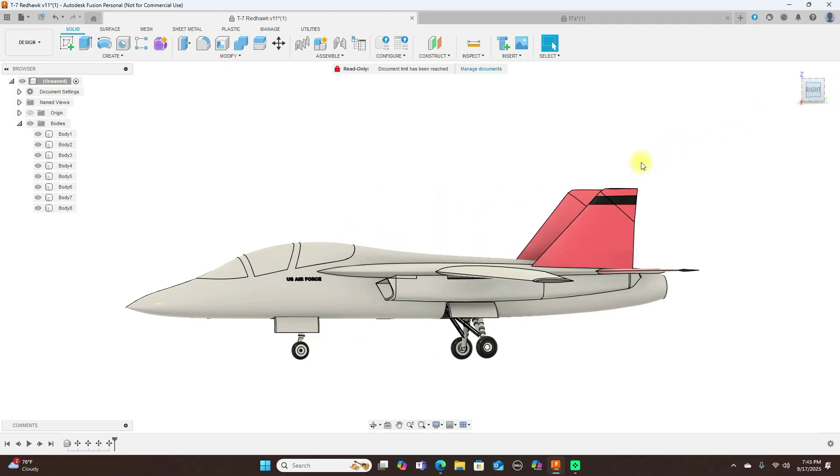Today, we're going to be looking at reverse engineering a T-7 Redhawk. Now, these files here that I have, I did not design these. I got these off of GrabCAD, so go over there and have a look if you want these particular files. This one here was a step file, and it looks like it was probably designed in Fusion 360, but I'm not sure because we don't have a timeline down here of this.

Now these commands here that I used were just to move this around to get it to where I wanted it to be. And so all of these are solid bodies, as we can see already. So like I said, I think this was maybe designed in Fusion 360. And because there's some openings here too, like right through here where the wings come into here and stuff like that.

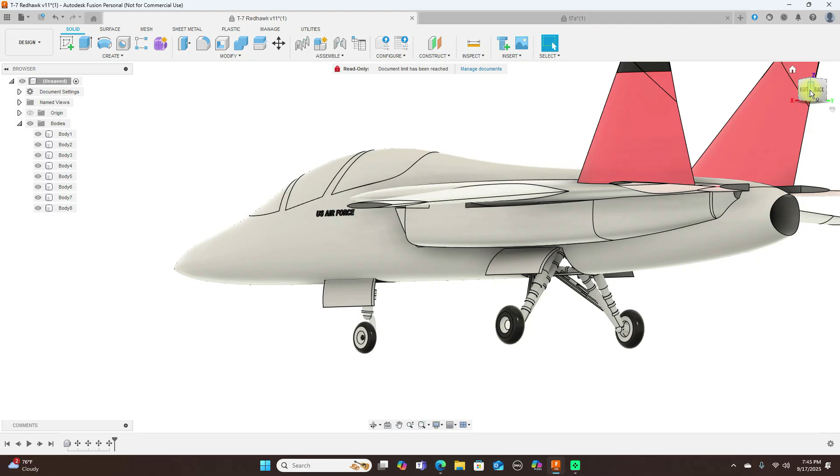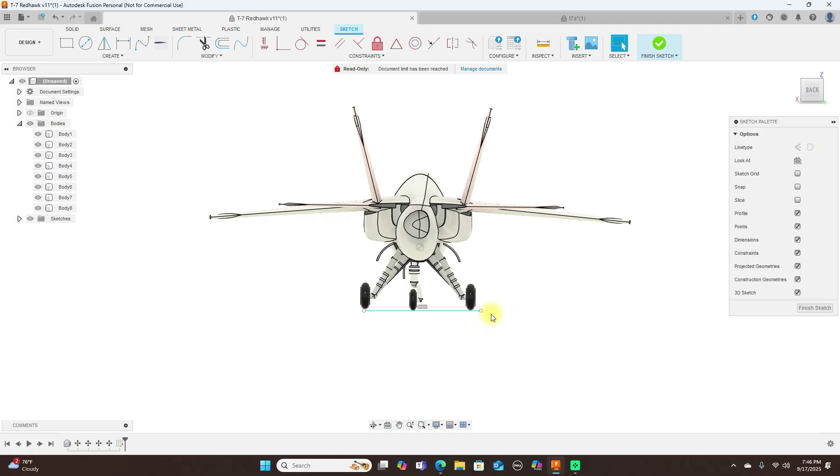And then this is not being totally round back here, and looks like it's just a little bit slightly off because the wheels seem to be flat across. Let's make sure. Okay, we can see that this is slightly to the right a little, and we can take this here and perhaps just move it to the left, maybe a degree. I don't know how many degrees that was. Let's just go with 1 and see, does that line up better? And it does.

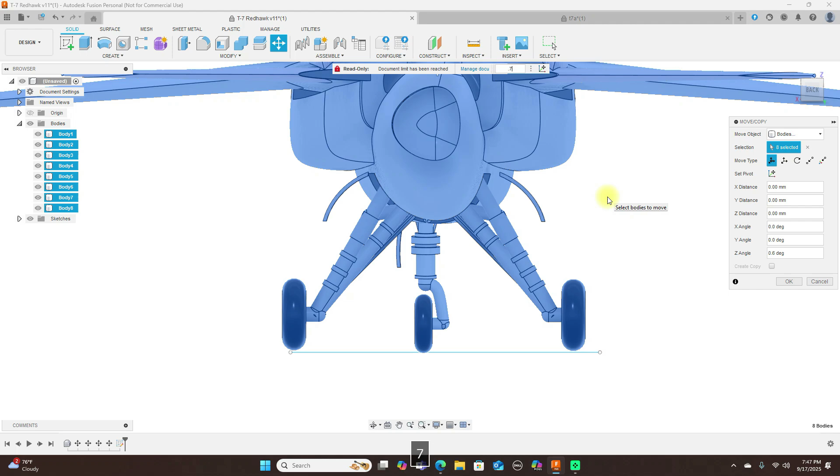Maybe it just needs to be 0.5. Let's go with that. And a little more, or 0.6. Okay, that's pretty much close. And like I said, you can see this is not symmetric here in the back, and this is sort of not symmetric here also.

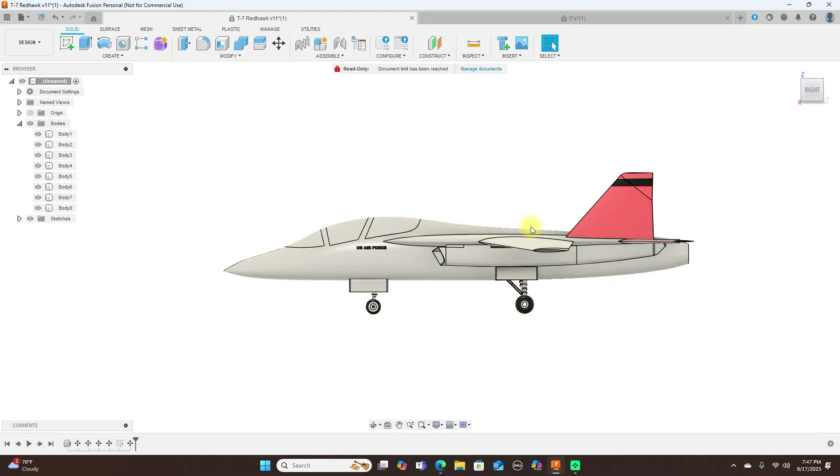So, if you guys want the files for this, just go over to GrabCAD and look for this file, and it is there. Now, I don't like reinventing the wheel, so that's why I went over to GrabCAD to see if any of these planes were available that somebody else had designed, and there were a couple of them over there. Again, this was a step file, and it should be able to open up in SolidWorks and Fusion 360. And then they had another model over there of it.

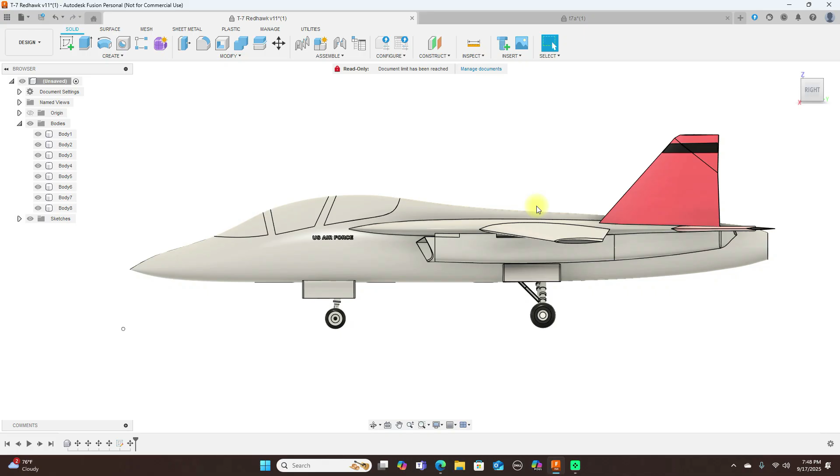And this one's a mesh. And now this was not designed in Fusion 360. This is a very good design of this. Now this other one here, since this is already solid bodies, you can go in here and modify this. So if you wanted to make formers from this, let's say you couldn't open the other file, the mesh file, what you do here, come up to construct and use an offset plane, drag this back. Let's say we'll go to here, for instance. Click OK.

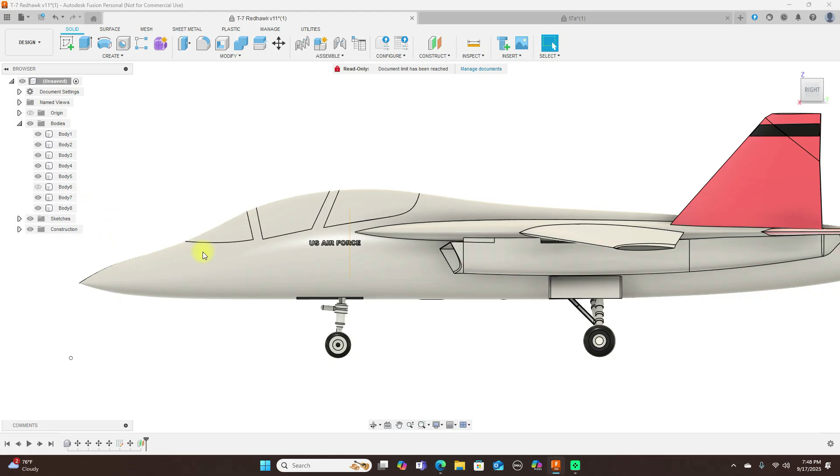I believe these are all separate. Okay. Now what we can do here is come up here to split body. This is the body to split. Go ahead and select that too. And then the splitting tool is going to be this plane here. And click OK. Now this is split. And so what we can do is turn the front off here and then turn these 3 pieces off also.

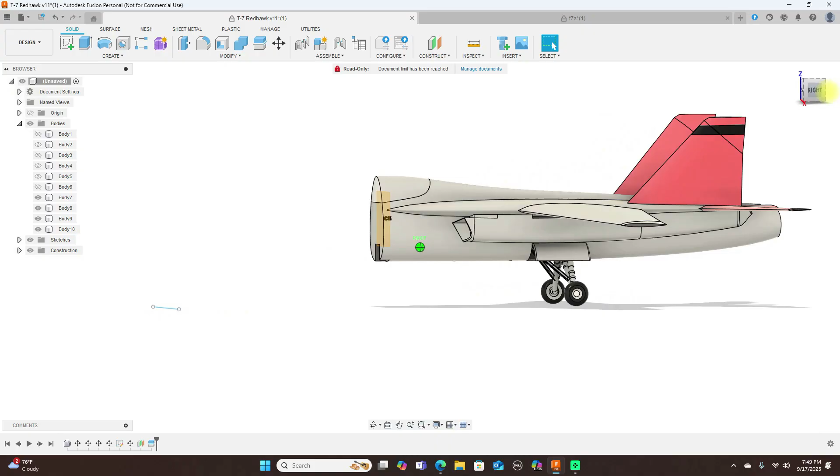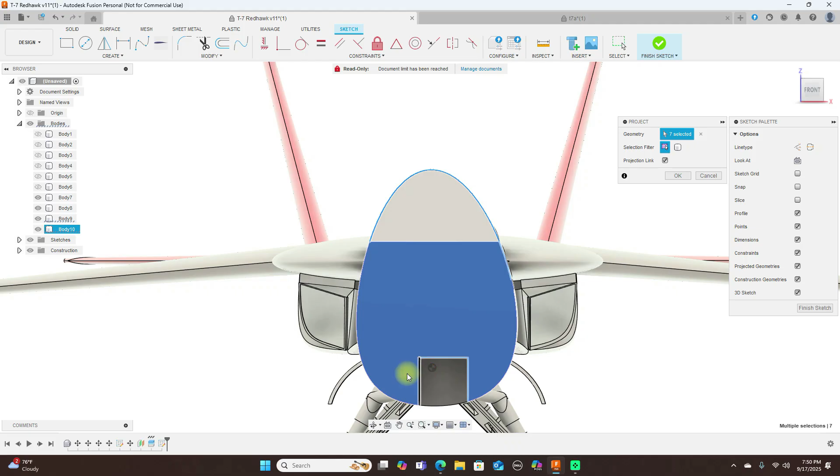Okay, we have this here. And suppose we need formers of this. To get the former, what we do here, create a sketch on this plane here. Now we're going to use the project tool and project all these lines around here. Click OK. Now we finish sketch. And we can turn off the bodies. But as you can see, our former is now here.

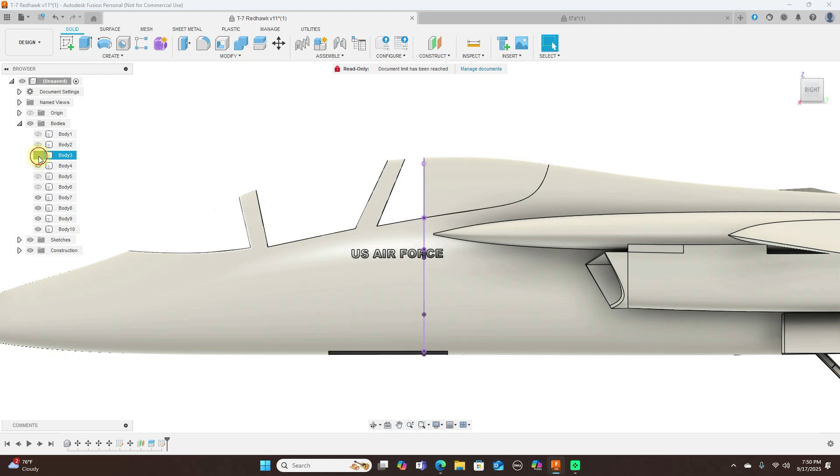So let's say we turn these back on. Okay, turn this front on back here. And we'll do another offset plane. Move this one here. Click OK and split body again. This is the body to split. And we're going to use this there. Click OK. And we have this.

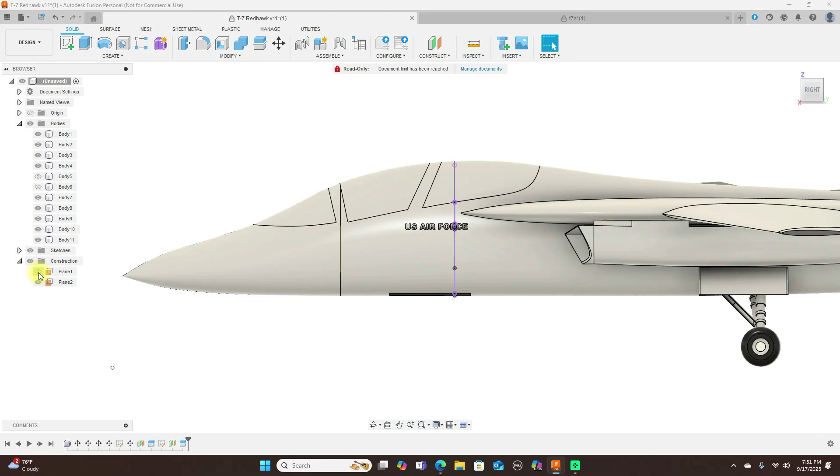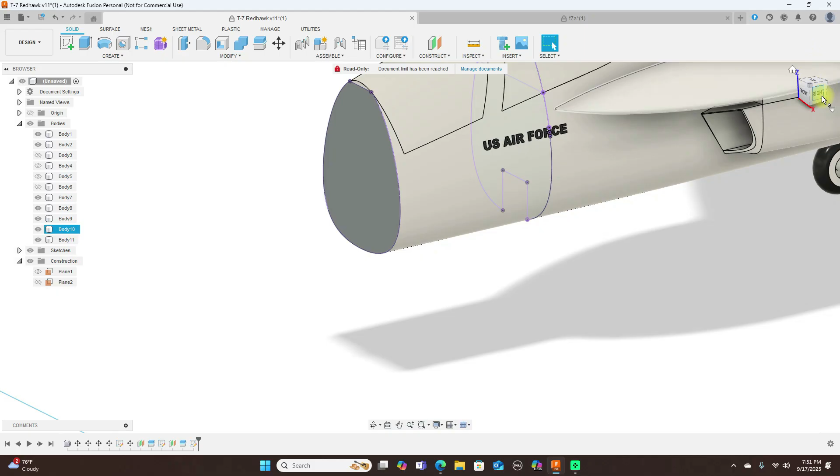Now we turn that plane back on. Turn these bodies off so I can see the plane. Then create a sketch on this plane here. Then use the project tool again. And we're going to project this. So now we can turn the bodies off. And now we have our two formers here.

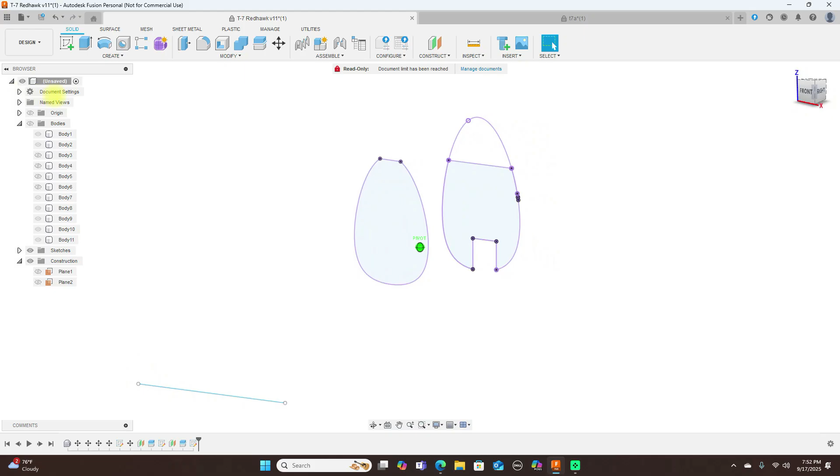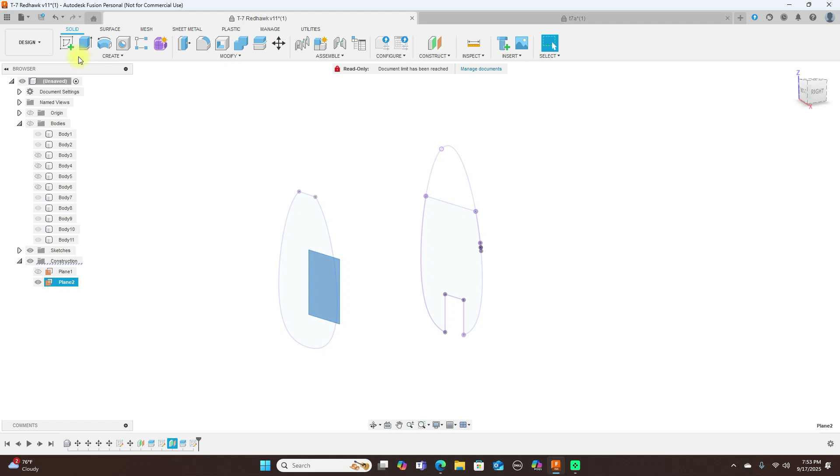Now to project this, not project it, I mean, I'm going to create a sketch on this plane here. Now this is flat up here. This needs to be round. So let's go ahead and cancel this. And turn this plane on. Create a sketch on this plane here. I just sort of missed some of that top when I split this. So what I'm going to do here is project again.

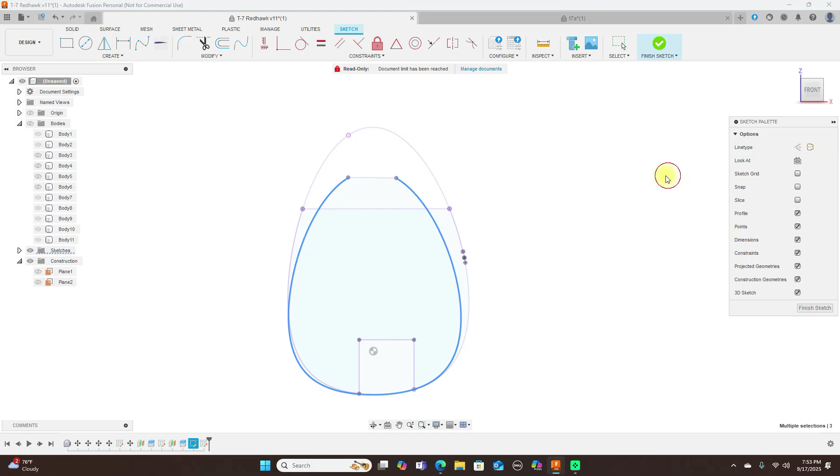Click OK. Let's just use a fit point spline here. Actually, use something else here. I'll use a 3-point arc. Okay, and now we have that there. And that's solid there.

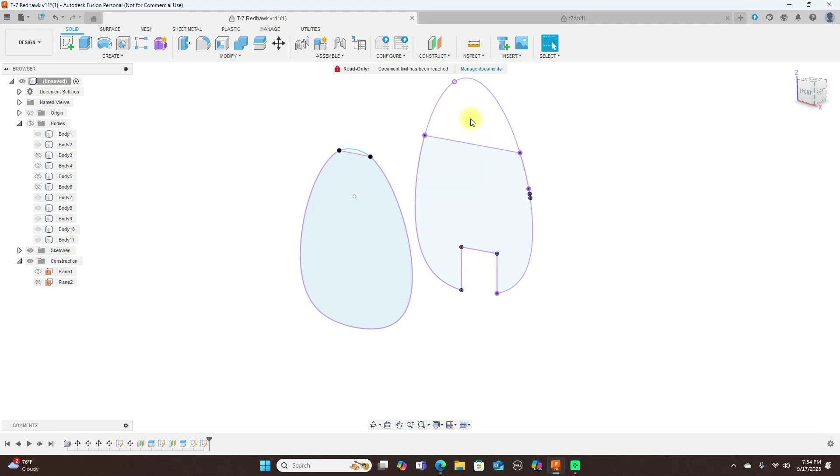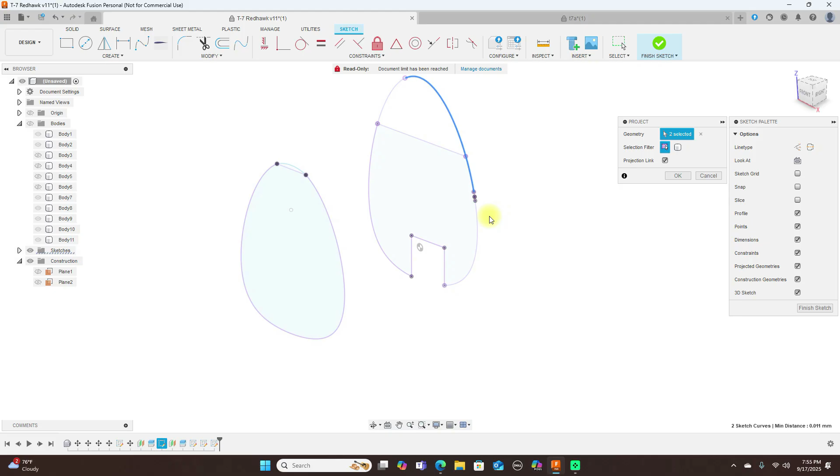I believe this goes all the way over there, and it does. So what I have to do here, I'm going to make this on here also. So what I do is turn this plane on, click this, create a sketch on that plane there, and then we need to project again. And project all these again, and make sure you zoom in to get it all.

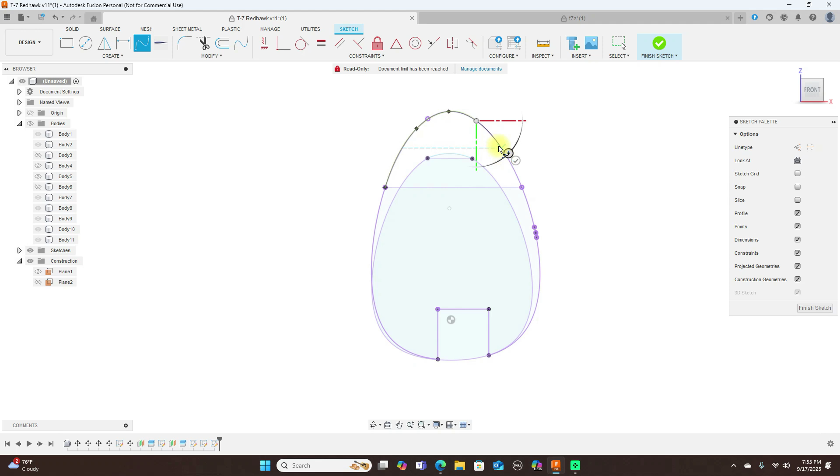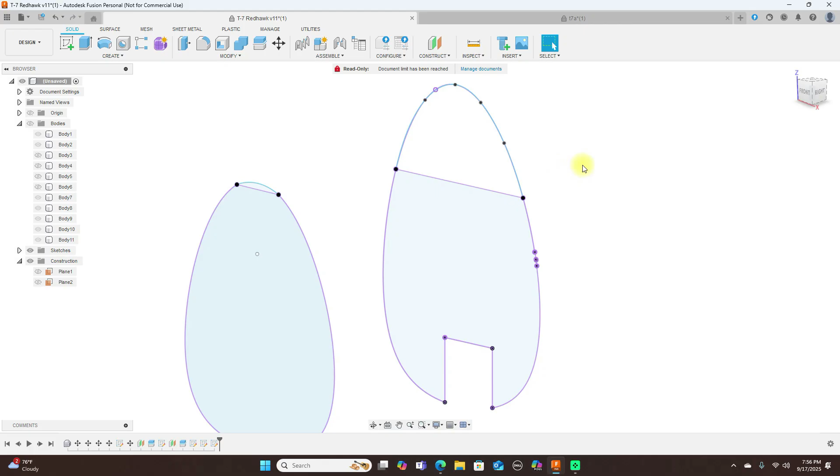Now, I don't know why this is not closing, but we'll solve that. And it still didn't close, but that's okay. Let's take a look at this.

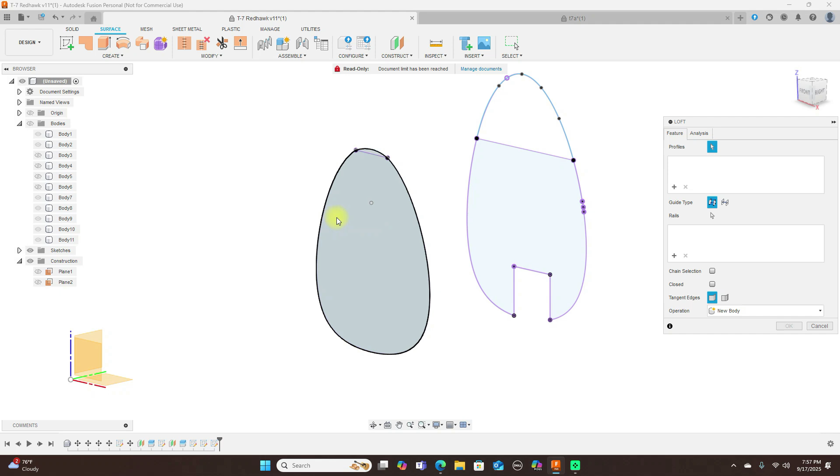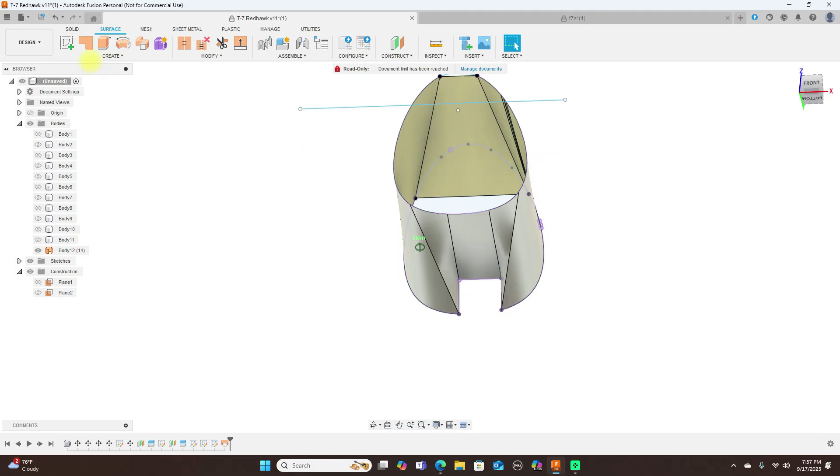Sort of odd, and I don't know why it's not working, but we'll work. Cancel this and do another way of this. Now, this does not look good at all because of this here. And we just can't loft like that. But no worries. But that's how you go about doing that, splitting this particular section up here.

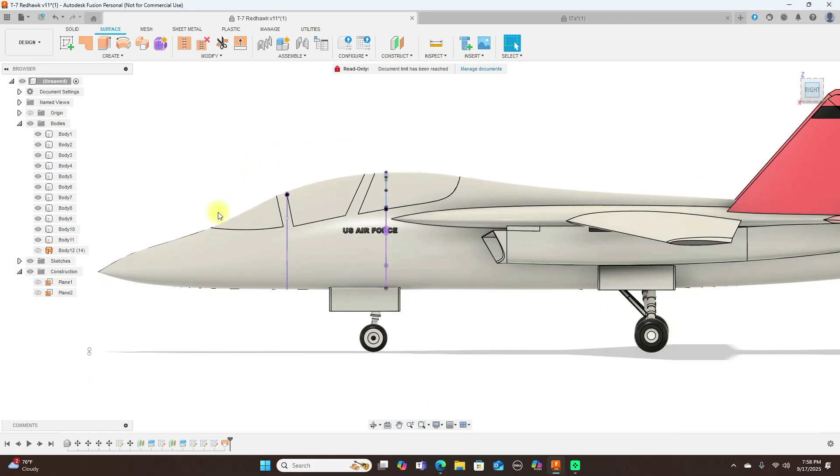Like that. So we have that piece there and this piece here. So to loft between here to here, just make a straight line. Let's go back here. Look at the sketches. Turn these. We need to make this closed at the bottom here. So what you can do here, create a sketch on this plane here.

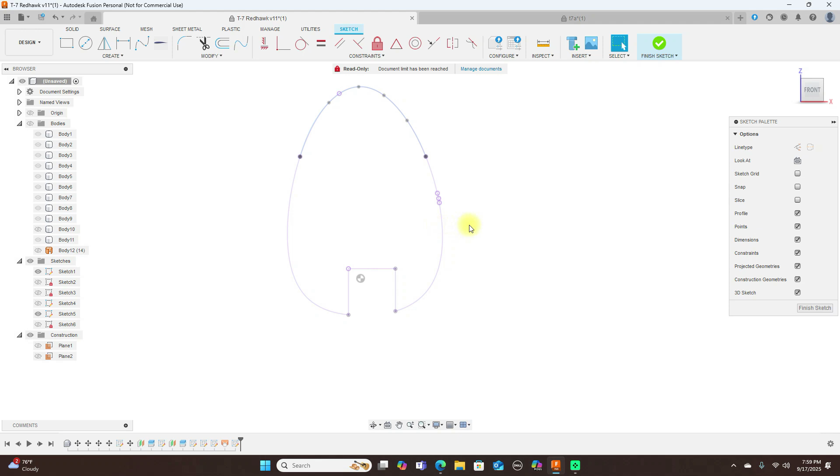And as we can see too, this is not even a really good section. This is not centered. So the person who designed this, it's got some flaws to it, but it's still okay to work with. You can see it's slightly off-centered, but it's no worries.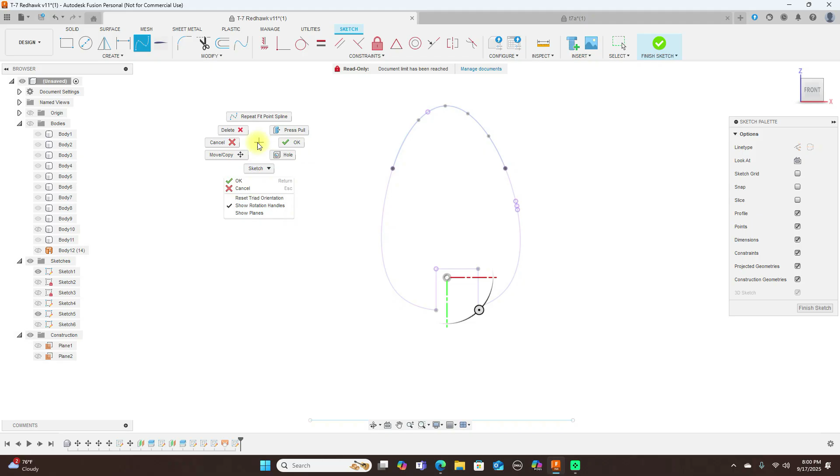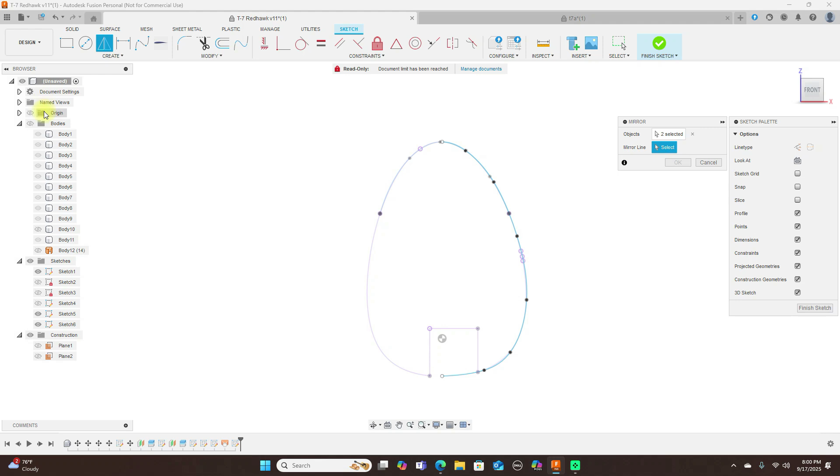Okay, now just come back up here and clean these lines up. Then I want to mirror that line too. And we can see that this here is slightly off to the way the model was designed, slightly off. So now we go ahead and use the loft. And turn all of these off and see what that loft looks like.

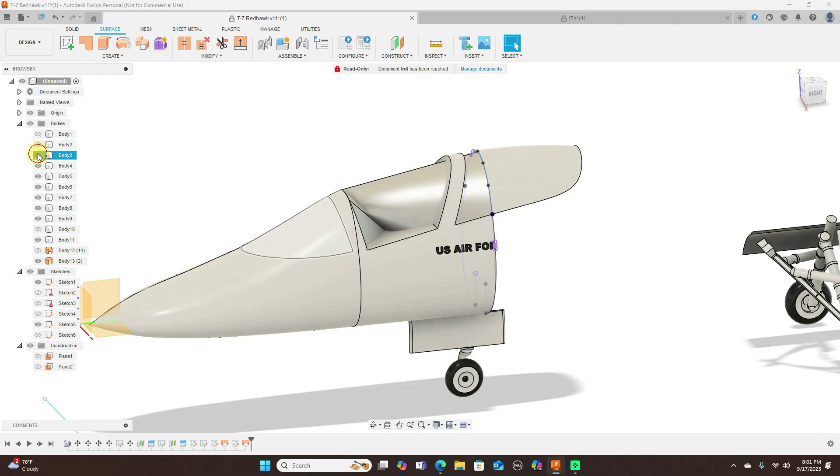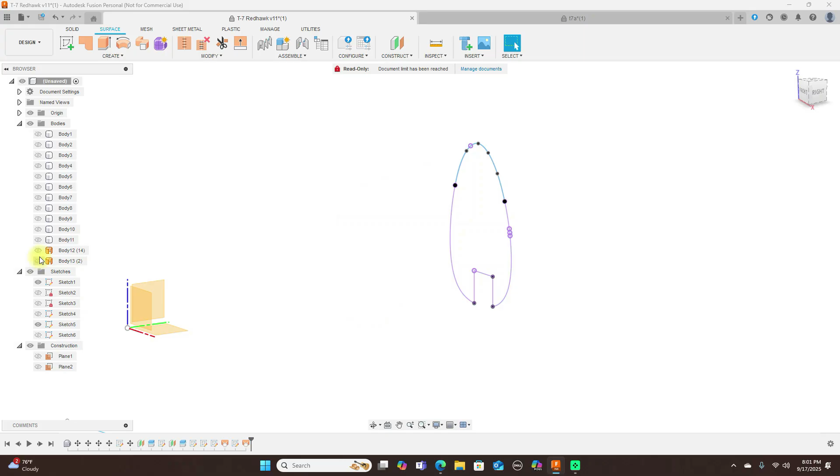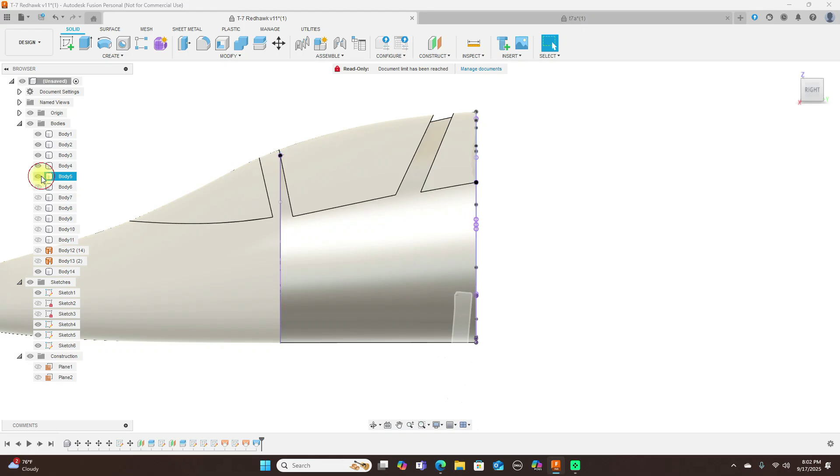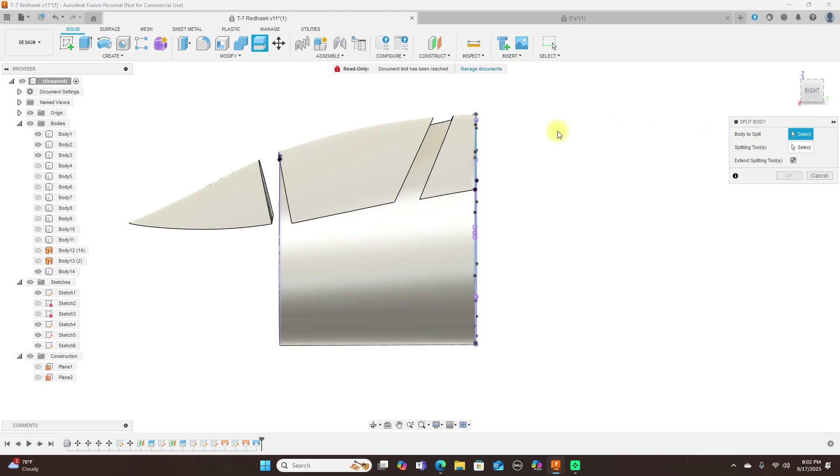Okay, now this is messed up too. Turn that off. Okay. Much better loft. So with this, possibly we just cut that in there. Just like that. So that's some reverse engineering here, how to do this.

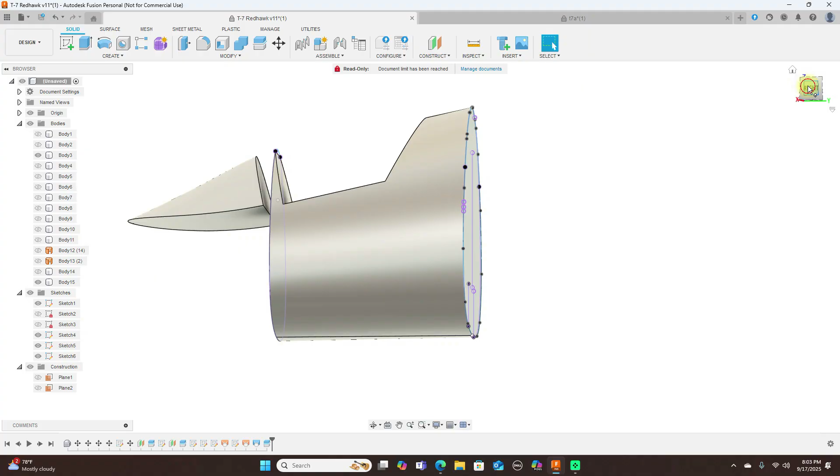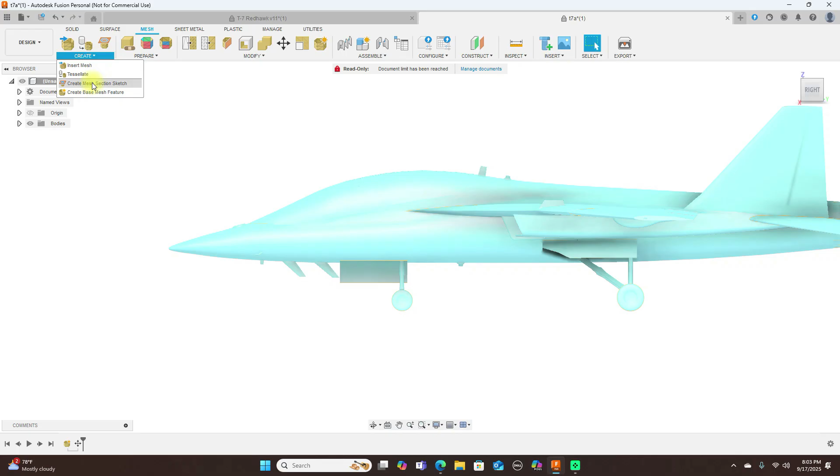But in my opinion, the best way to do this, go back to here, this particular one. Then switch over to the mesh tools. And here what you want to do, come up to create and create mesh section sketches. This is what we're going to use, and then our section plane. Let's start up here.

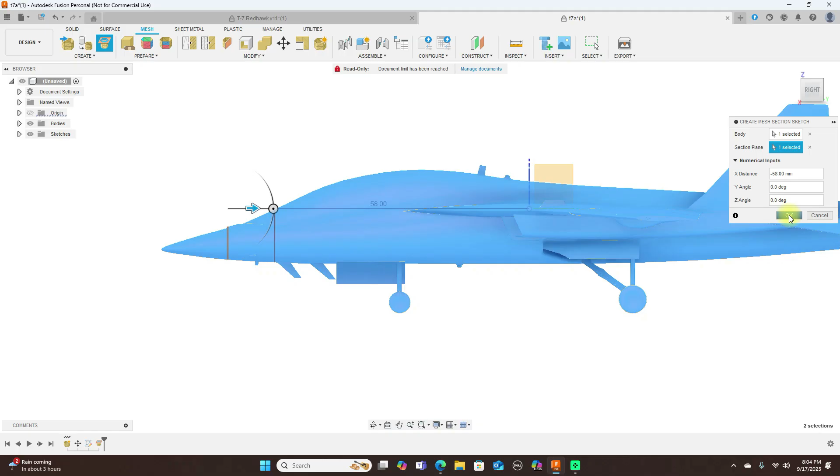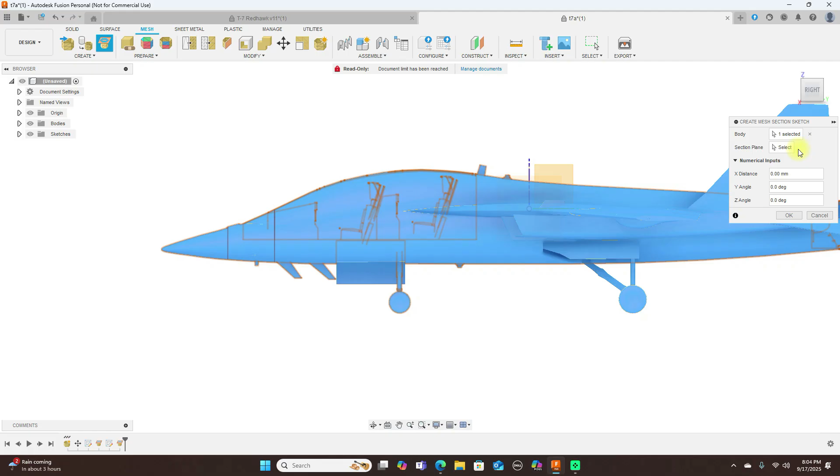And do that again. And I'll do one back here. Turn the bodies off. And we have our former shapes here now. And we're going to use offset planes. Oops, sorry, not plane at angle, offset plane.

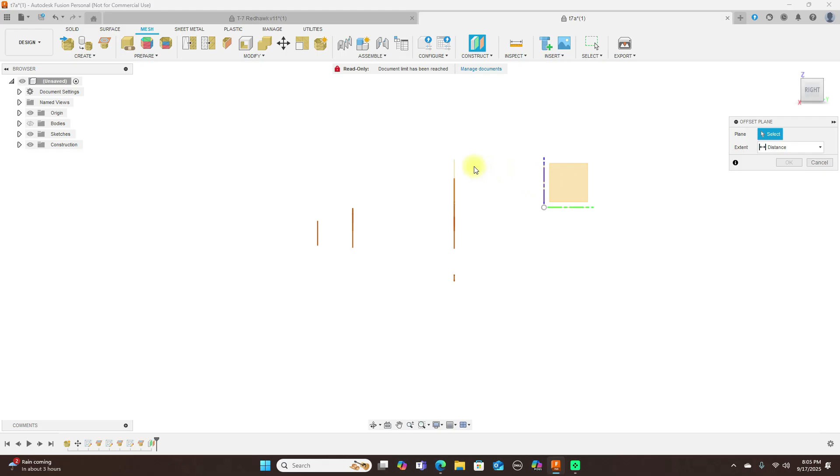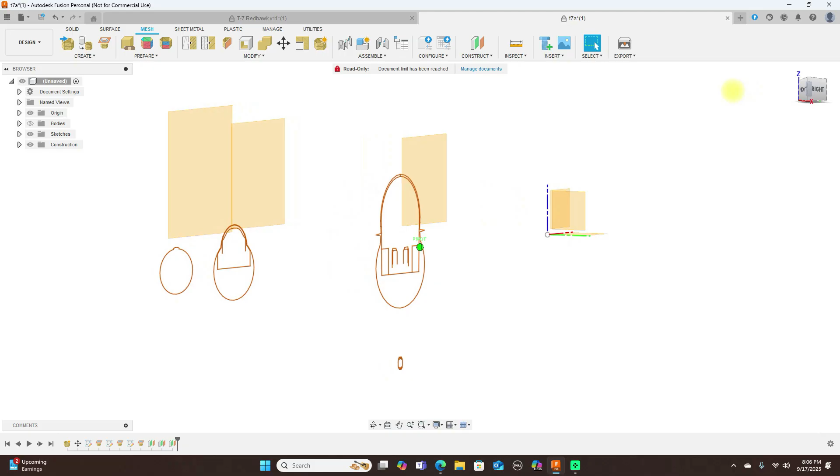Then I want to put the one there. One there. One there. Click OK. And we're going to do these two. So create a sketch on this plane here, but we go back to solids.

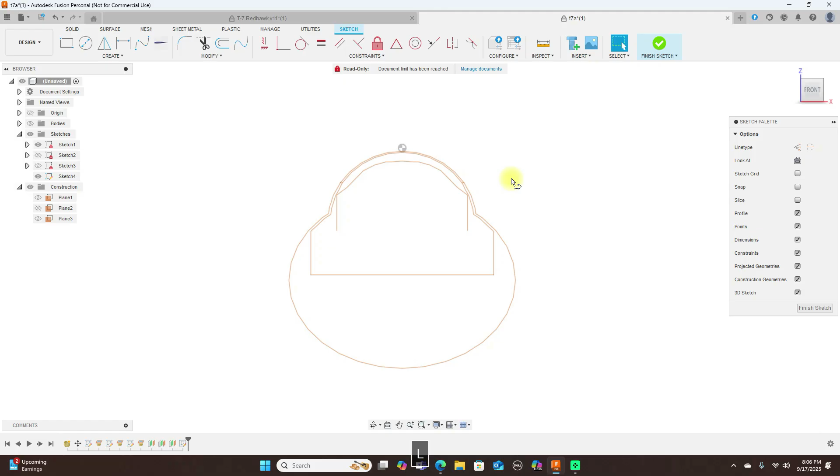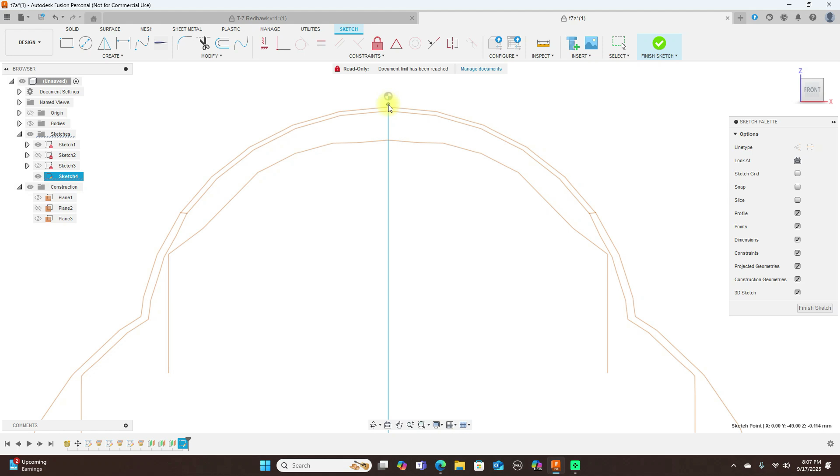Draw yourself a center line. Now it's locked onto there, but we can move it down now. Let's change that to construction by selecting X. Then use fit point spline.

Yeah, this is for the people that want to learn how to do this. Like I said, I don't like reinventing wheels. If it's already modeled, I'll just go ahead and use it. But if you want to model it yourself, this is how you go about doing that.

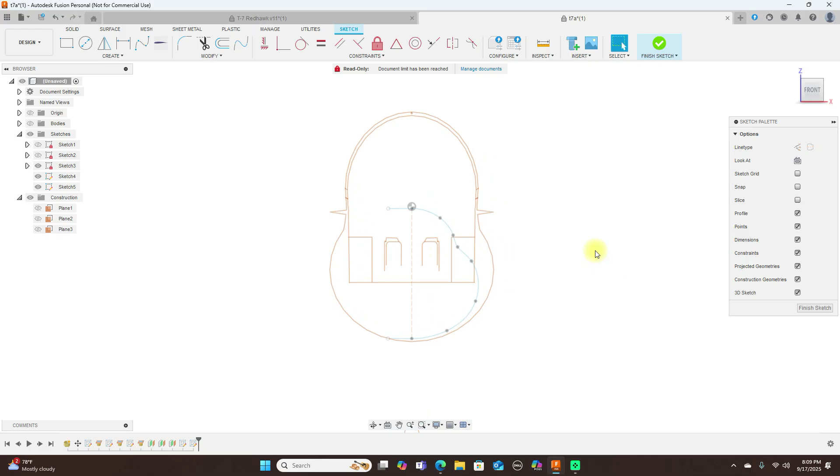Okay. Now create a sketch on this plane here. Again, we're going to do the center line. Change this to a construction line.

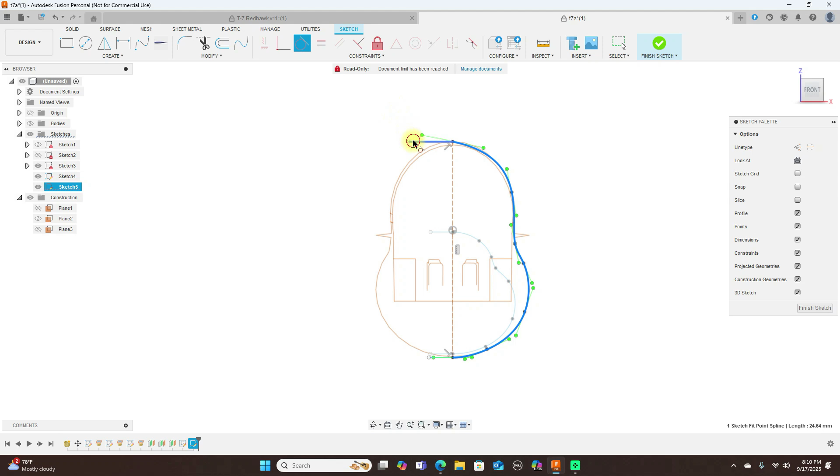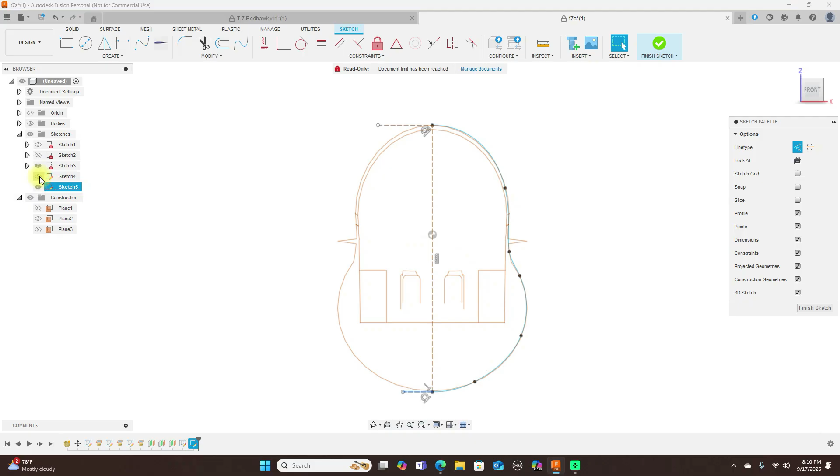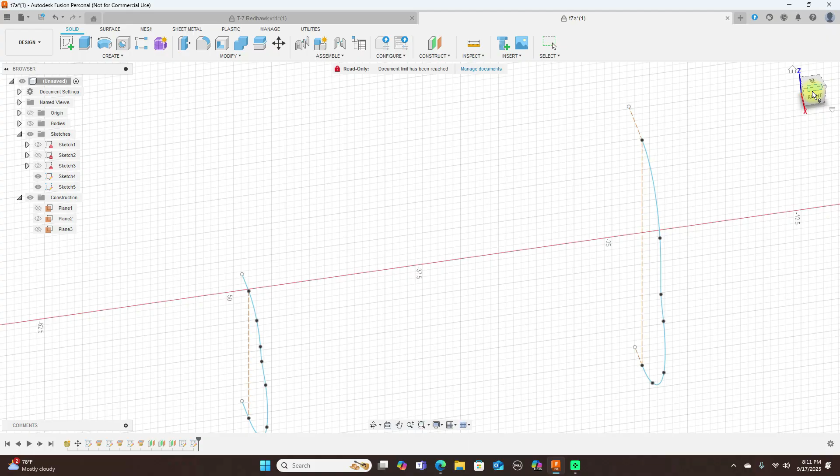Okay, and now I make these lines construction lines also. Okay, now this is what we've drawn so far, or sketched. Go ahead and finish sketch. Create a sketch on this plane here. And use project. And project these points. Click OK.

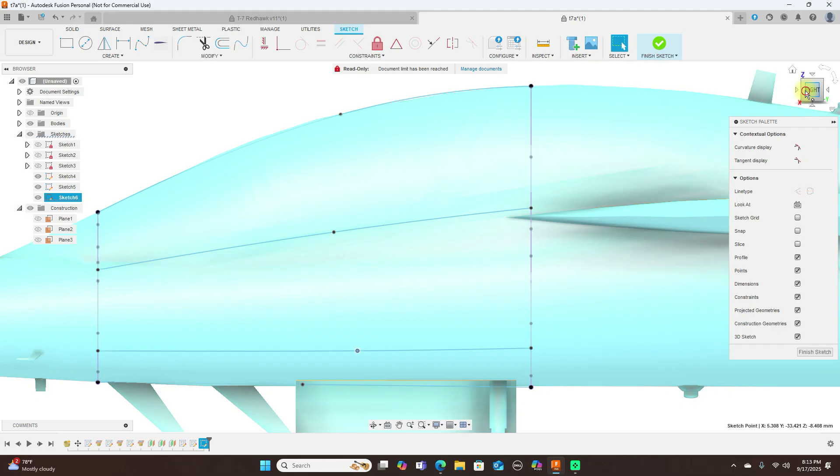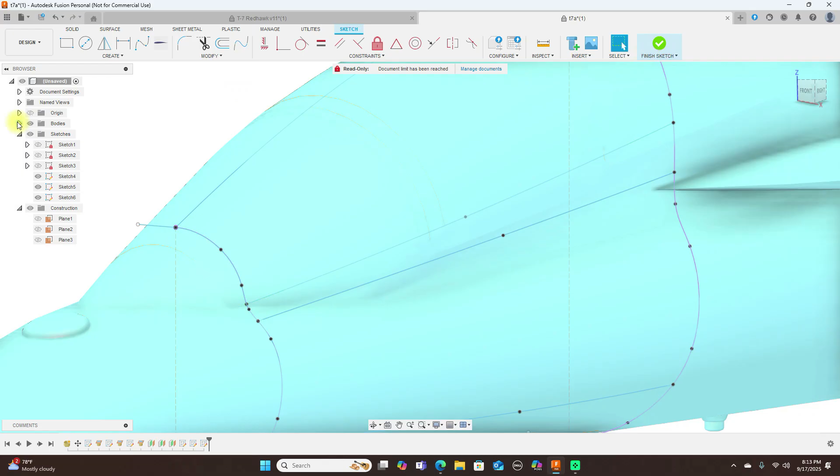And put one more in here just in case I need it. I may not need this. Finish sketch. So our spline cage, change to surface, and we're going to loft. Don't know why it does that, but it does. Loft between here to there. Then we're going to add rails. So click the plus.

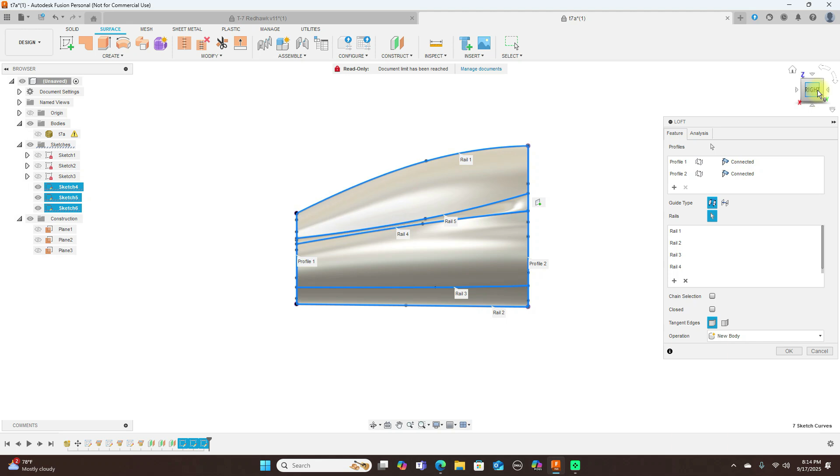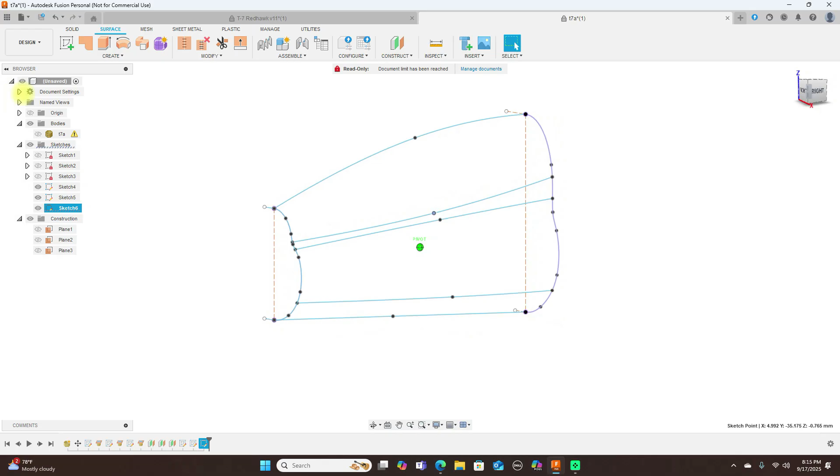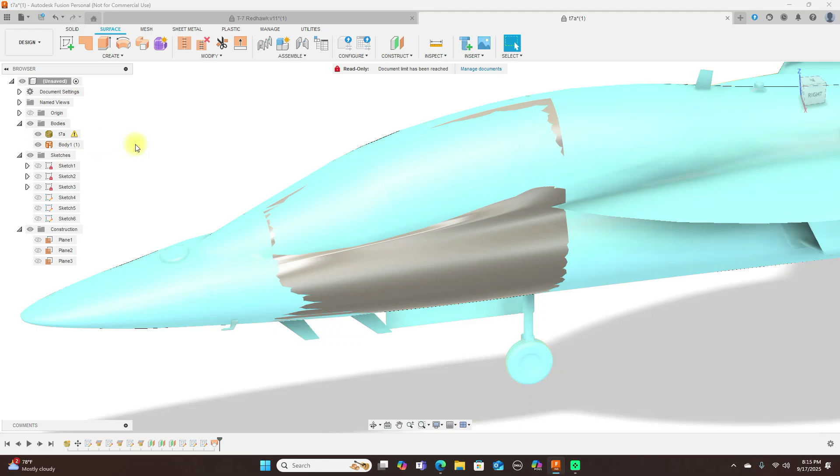Okay, I didn't move this one out. Now let's loft that again. Zero this out, clicking that X. And adding rails again, click the plus. Finish. All right. And you can see that matches pretty good with that.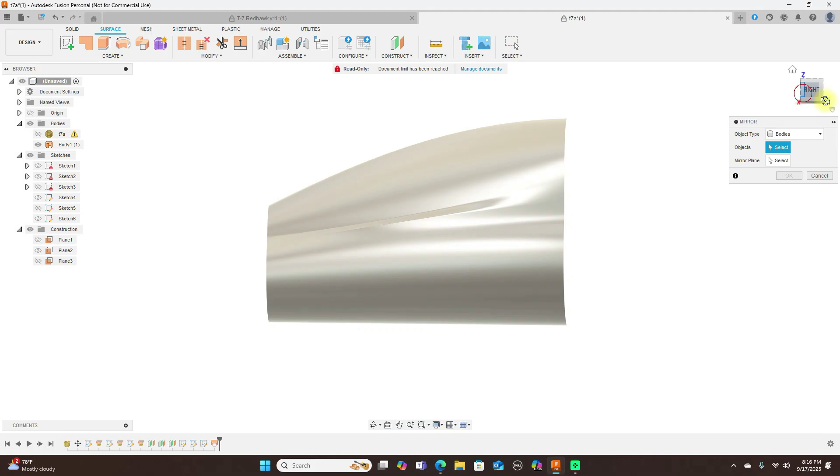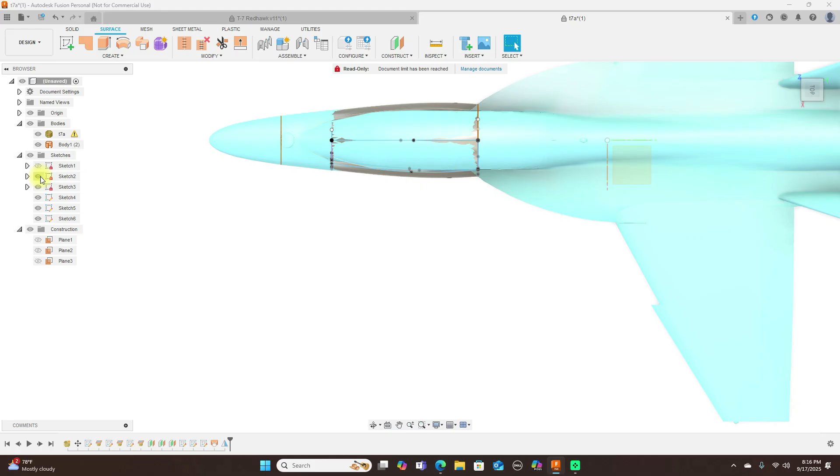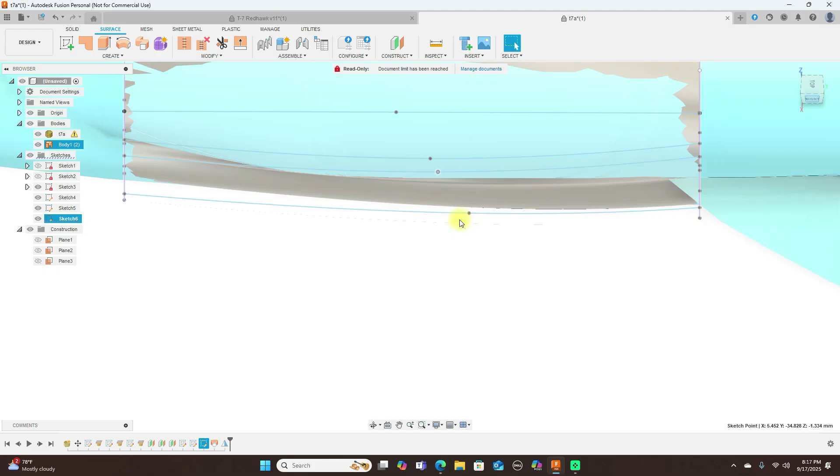So now turn this back off here and come up here to create mirror. This is the part I want to mirror. And we have this. Now you can see there's maybe just a slight gap out here. Okay. And that looks good. But that's how I would do that.

And then I go through the whole plane like this. But then again, you have to make sure, when you come to places like here, you have to design or think in your mind how you're going to go about doing these types of areas and stuff like that. And it's not really much of a problem.

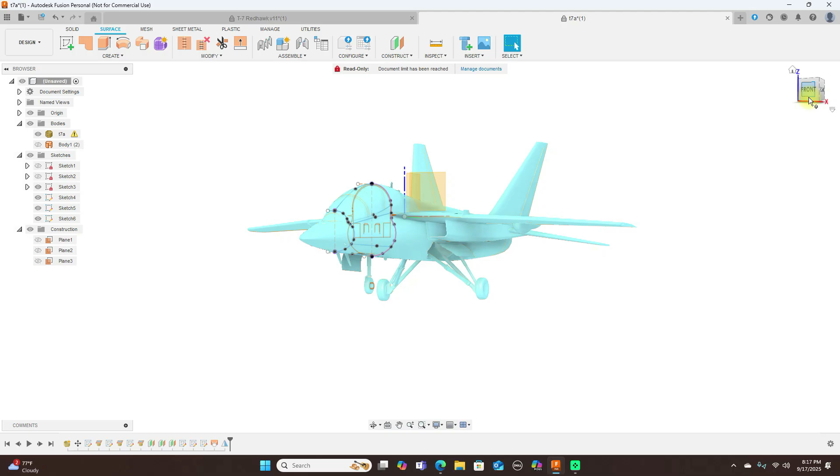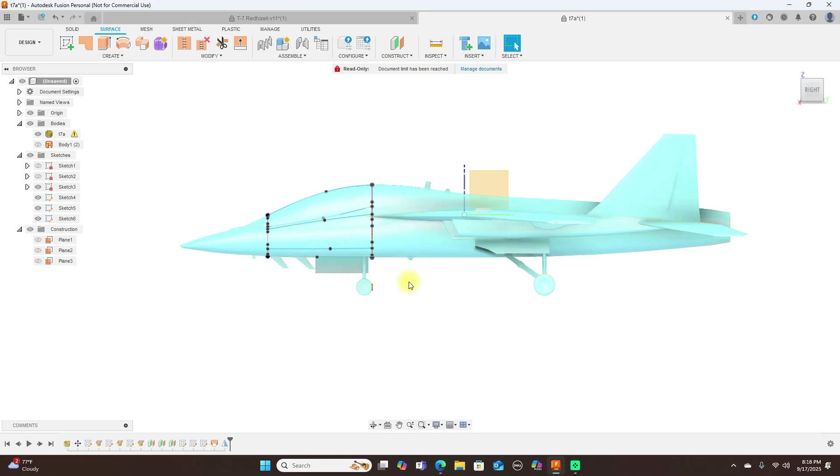But when it comes to reverse engineering stuff like this, I prefer to use, say, a mesh file like this. That STEP file that I got, the design of the model is very good, but there's some things that are off with it. This particular mesh file here seems to be really well designed. And once again, I've got these files off of GrabCAD for this.